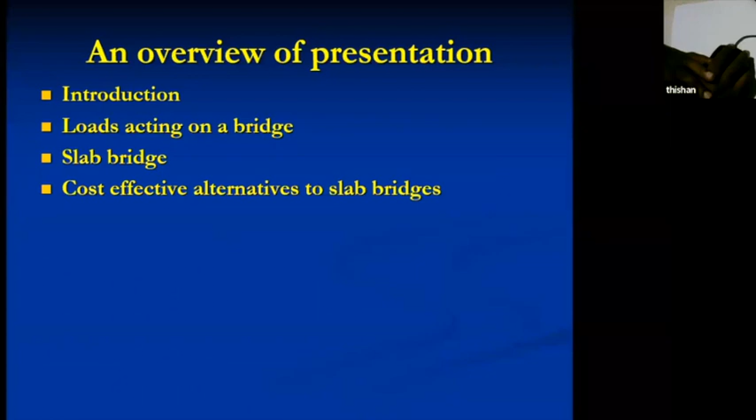So we can have alternatives for slab bridges, and how they have evolved. We can also look at value engineering solutions for flyovers, how we can use value engineering. That's a very important topic, especially in today's context, because we are having a financial crisis. In a financial crisis, it's very good if we can come up with economical solutions rather than typical solutions. That's where value engineering becomes very important.

Another topic very applicable today is elevated highways and expressways. For example, on the outer circular road in the Malabe area, the road is elevated because it's a floodplain. For elevated bridges or expressways, we need continuity to avoid expansion joints for about 5 to 6 spans. With only one expansion joint, there is continuity for the other spans, so the bridge is continuous. Continuity is a very important topic in today's context.

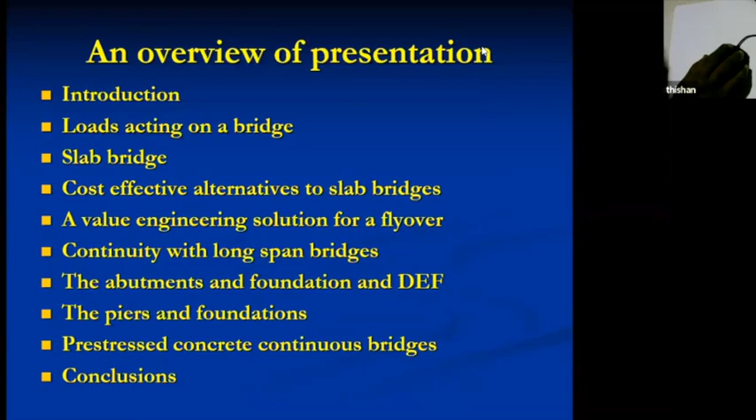Whereas if you look at most of the other elevated highways and expressways, they are actually continuous structures only for live loads. They are not real continuous structures; they are precast pre-stressed concrete elements made continuous using pre-stressed or reinforced concrete. So there are many different types of bridges available in Sri Lanka. It's important for us to first identify the different types of structures we come across in bridges. So to start with, I will stop sharing and tell you a little about the historical evolution of bridges.

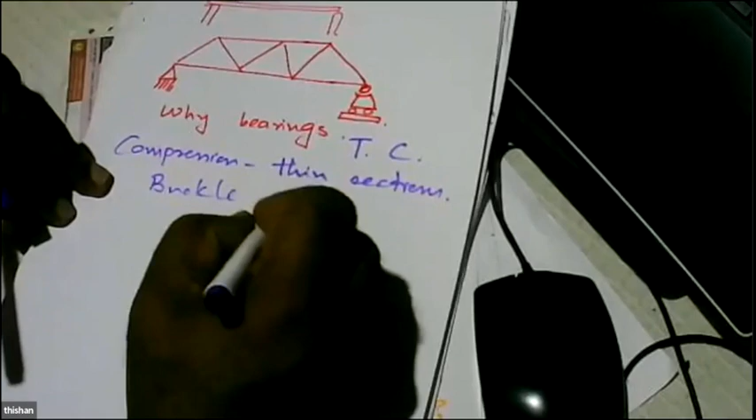Now steel is a very good material for tension and compression. But in compression, these thin sections would have a problem. What is the problem? They buckle. When you compress a thin steel section, the section can buckle and fail.

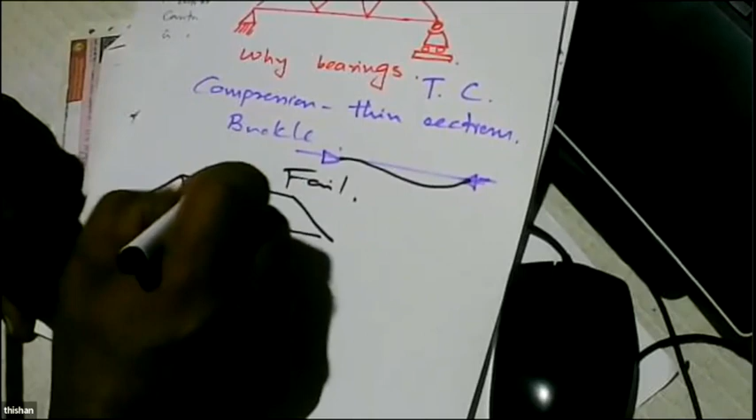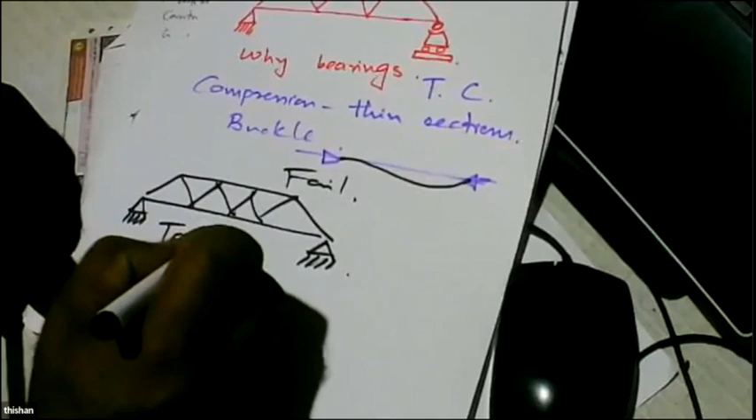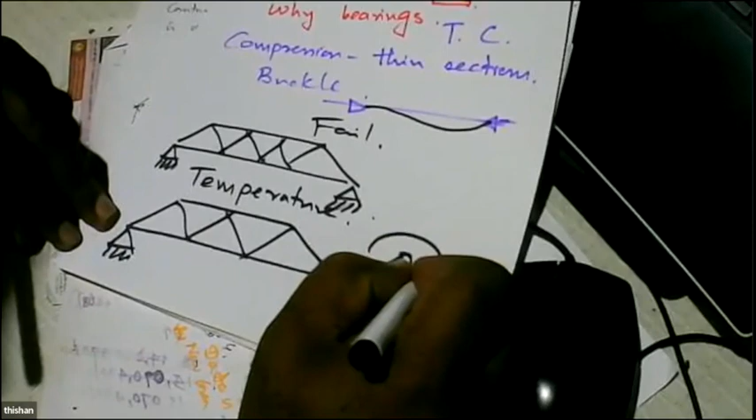So if you have a bridge like this and it is fixed, what could happen? There will be temperature induced stresses. Because of that reason, people thought if you have a bridge, it has to be on roller supports, and you can also have rocker supports, meaning it can rotate and move. So today we call them bearings.

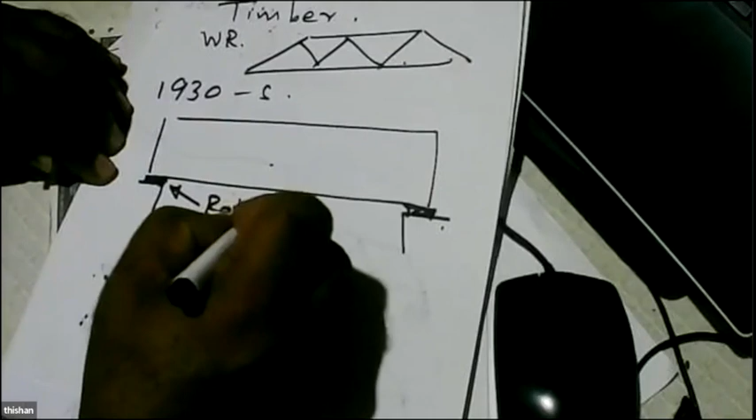In the 1930s onwards, people thought, let's have concrete for bridges, and you put it on a rubber pad. The rubber pad allows rotation and expansion, though this rotation would be very small.

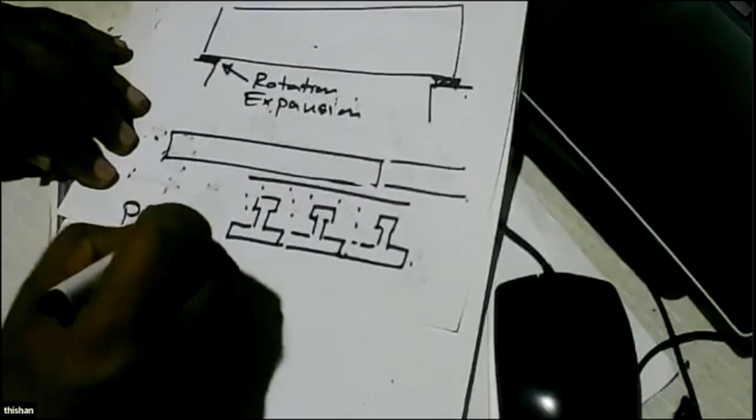Then they thought, let's go for beam bridges, thin slabs converted to bridges by placing precast beams like this, and then you put concrete. So you get a slab, a pseudo slab, that looks like a slab.

When they did this, they did it first in the cold countries. They thought concrete bridges also need bearings. So you get an expansion joint, a premix layer, and when you pass this joint, you can hear a sound from the tires of the vehicle.

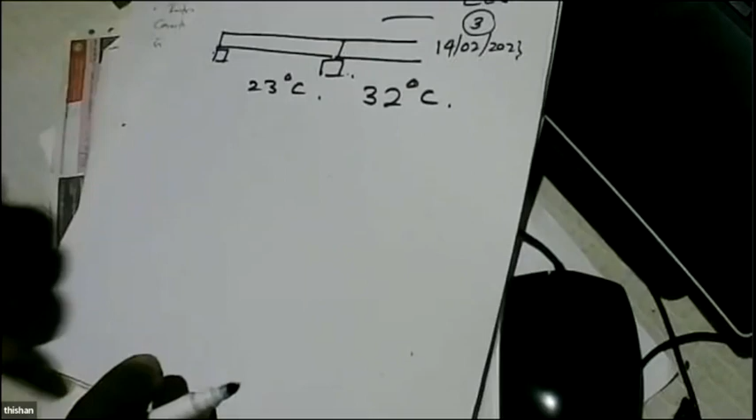So if you look at a country like Sri Lanka, our morning temperature is 23 degrees, even afternoon temperature is 32 centigrade—our temperature variations are very small. So even if you don't have expansion joints in Sri Lanka, what will happen? The bridge will expand during the daytime, and that can induce compression on these members. Because we have fairly thick members, the chances are they can take this compression very easily and will not buckle. Instead, it can lead to some pre-stressed concrete situation in the beams.

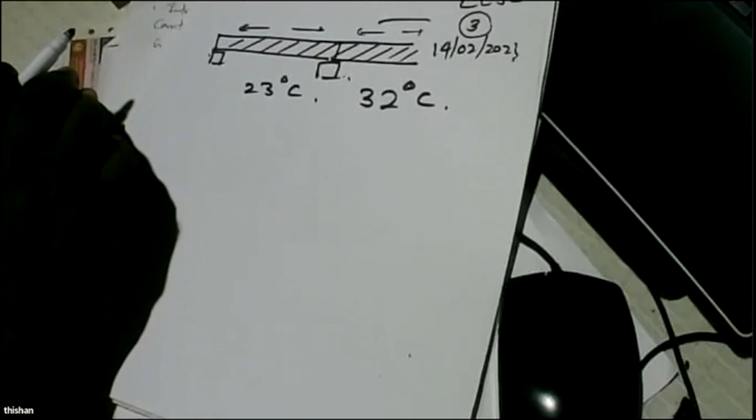So basically, we have been doing some studies for Sri Lanka, and what we found was expansion joints are not really necessary for bridges constructed in Sri Lanka. That's why you can see that we can easily have six spans or even ten spans as continuous, and then have just one expansion joint. Because at every expansion joint, you can hear a slight sound from the tires, that can be minimized by making the bridges continuous.

Our usual practice has been having about six spans of 30 meters each, so every 200 meters you would have an expansion joint. But our current work shows that even if you have one joint every 300 meters, nothing can go wrong in our bridges because our temperature variations are very small in the tropical lowlands. But in the upcountry, sometimes you can consider having a lesser number of spans, because we can't have very long bridges there—the topography does not allow continuous roads.

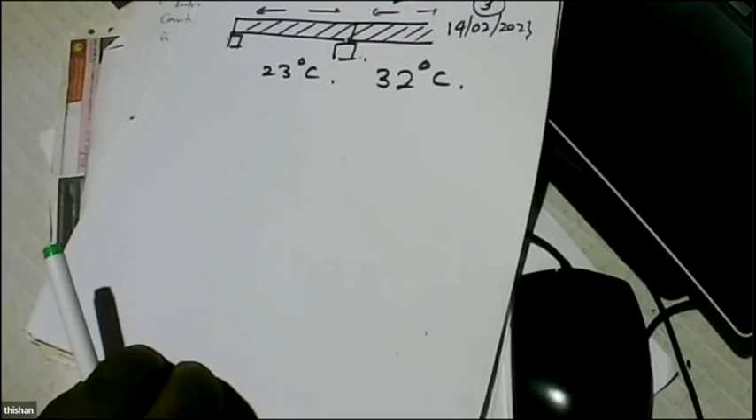So the chances are that most of our bridges, flyovers, and expressways where continuity is needed will be in the tropical lowlands with very low diurnal temperature variations—daily variations are very small. Because of that, even though the bridge heats up during the daytime, it's still possible to have a bridge where the expansion joints occur only once every 200 to 300 meters. That's one important point we have to keep in mind.

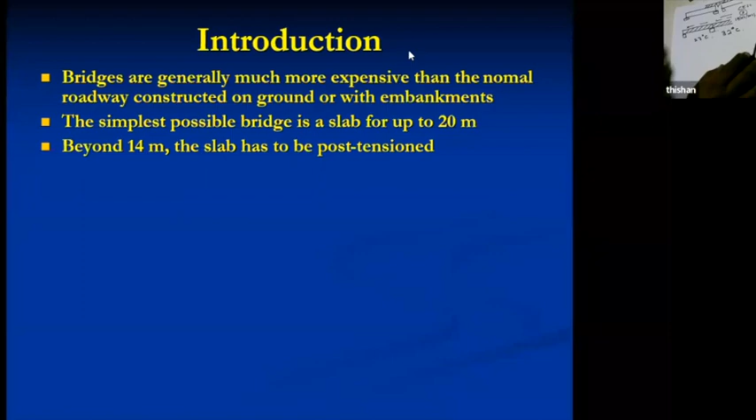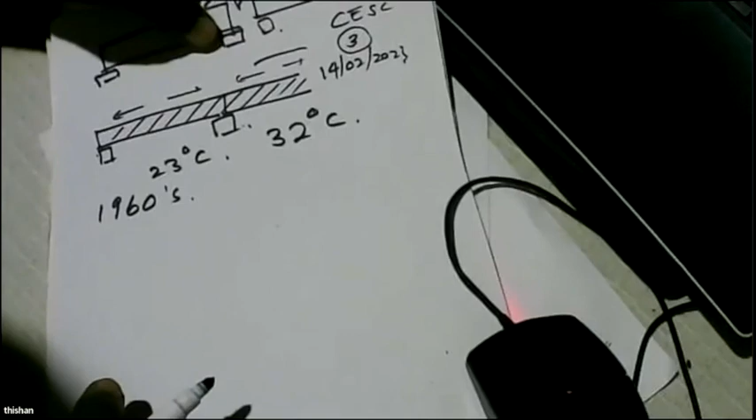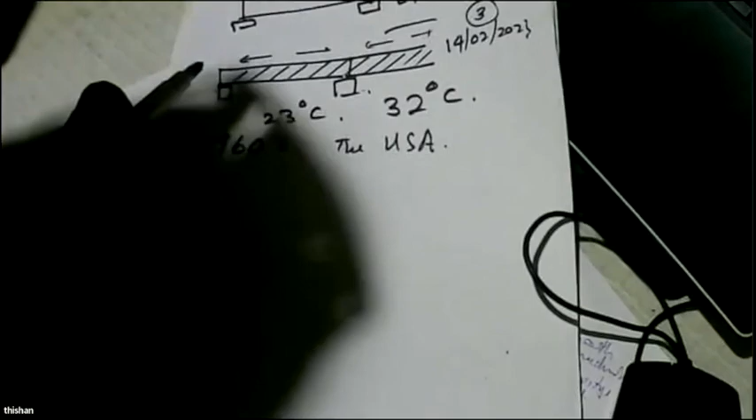So I can tell you something that happened in the USA. They had to develop their road network in a big way from the 1960s onwards, because road traffic increased a lot with economic development in those countries. A vehicle per family is a USA concept, but in Europe the concept was very different — it was a concept of public transport. However, from the 1960s onwards, they saw a change in policy, and then they had to develop many rural roads.

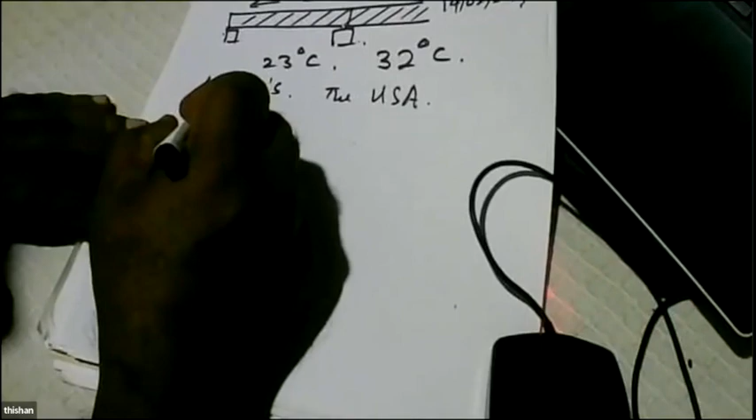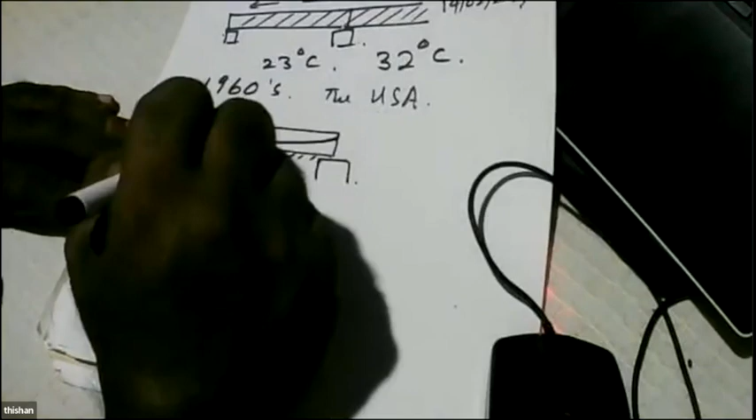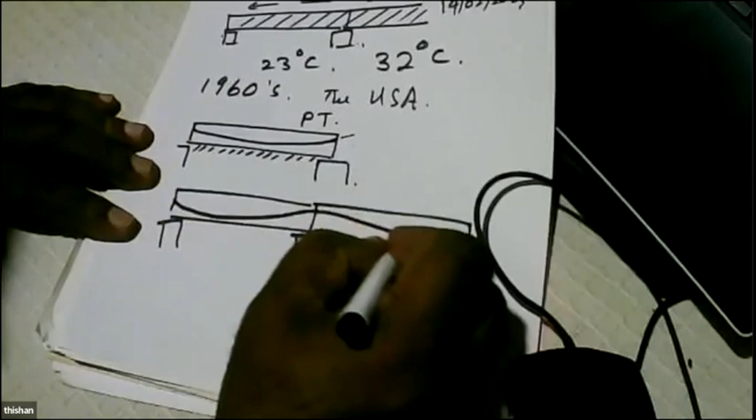They found that up to 20 meters, the easiest thing is to prepare some formwork and pour concrete. Before pouring, you place some pre-stress tendons, and after pouring, you stress it, making it a PT post-tension bridge. Sometimes they even did 2 spans in one go, with pre-stressing tendons like this.

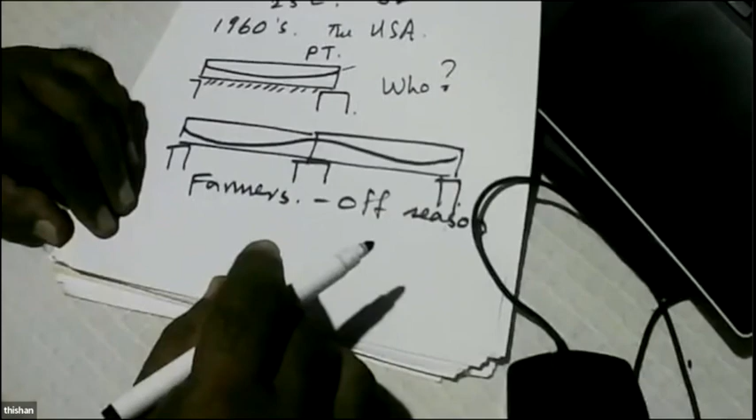Then you'll ask, who constructed these? Those were constructed by farmers in the off season. During the winter season they can't do cultivation, so they would build bridges during the season they don't have farm work. That's why slab bridges became so popular — people without much technical training can construct them once there's sufficient supervision, because these bridges are very simple.

And then what happened was, Europe was having a lot of highways, A-class roads. Then in the 1960s, they started constructing what we call motorways in those countries. In England they call it motorways, and in Germany, autobahns. Expressway is, I think, maybe a USA word, and in Sri Lanka we call it expressway, which implies access control.

So they had A-class roads, and the highway would come like this with abutments. These highways had to be completed very fast. They found there's no way you can have formwork here because it would block the road. So the ideal solution was to go for something precast and place concrete, so the disturbance to traffic is minimal. That's how precast construction evolved.

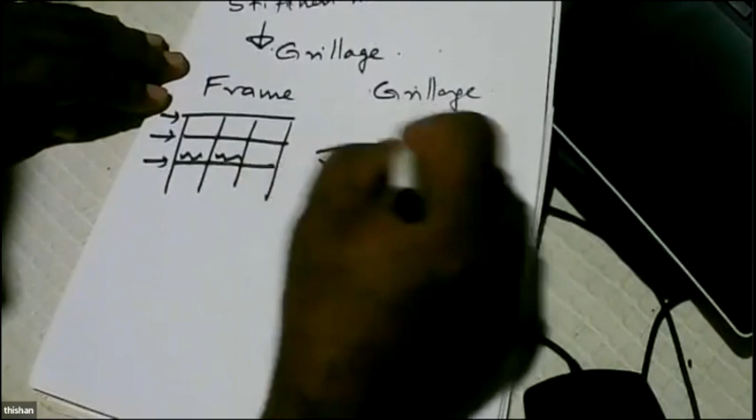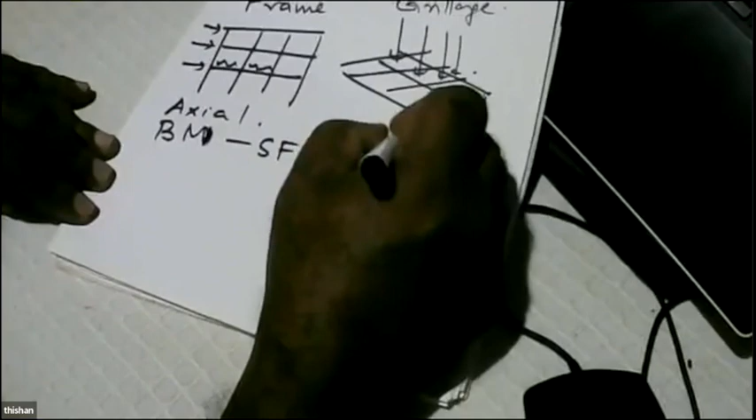On the frame, we apply the loads on its own plane. On the grillage, we apply the loads perpendicular to the grillage. So on the frame we get axial forces and bending moments — whenever you have a bending moment, you have to have a shear force. Here, in the grillage, you get bending moments, shear forces, and torsional moments, but no axial forces because it's loaded in the plane perpendicular.

And this grillage modeling using computers made the life of bridge engineers extremely simple, because earlier the problem was that you have a plate, with different vehicles using it, and finding the bending moment, torsional moment, and shear force was a huge task.

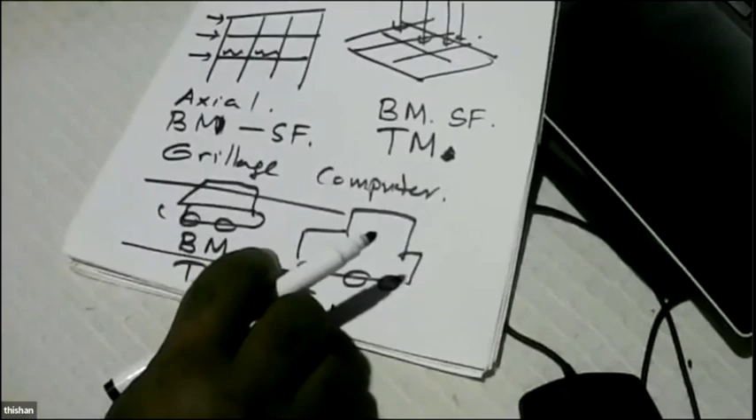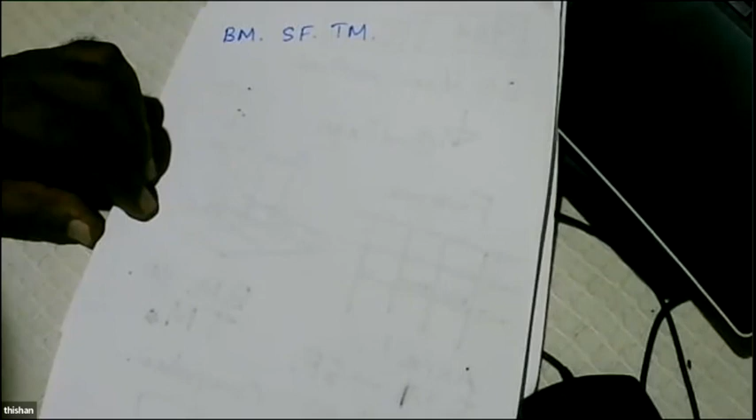Bridge engineers spent hours, days trying to find the maximum bending moment induced on a bridge. They spent a lot of time. But with computers, and once the grillage method was developed, things became much better because they could get bending moments, shear forces, and torsional moments in a much shorter time.

So that's another advancement that made bridge engineering a popular area of specialization.

To avoid formwork, slabs have been modified with precast beams and cover up to 18 meters. Still, a penalty has to be paid due to the self-weight, so there was some room for improvement.

For long spans, precast and in-situ cast methods can be used. As I told you, people now generally use 30 to 35 meter long precast beams, generally I-girders if they are pretty long. Otherwise, the standard Y beams and M beams can be used.

But we are actually using even continuous prestressed concrete bridges in Sri Lanka. One is currently being constructed, and about 60% of the work is already over.

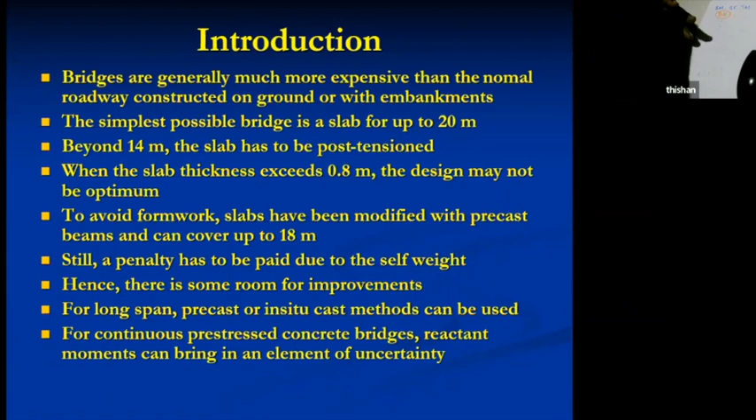So let's look at the loads on bridges. Bridges are supposed to carry moving loads, but when designing, we design the bridge for static loads. There are different types of loading. If you look at the British standard, we have type HA loading consisting of a UDL and a KEL load.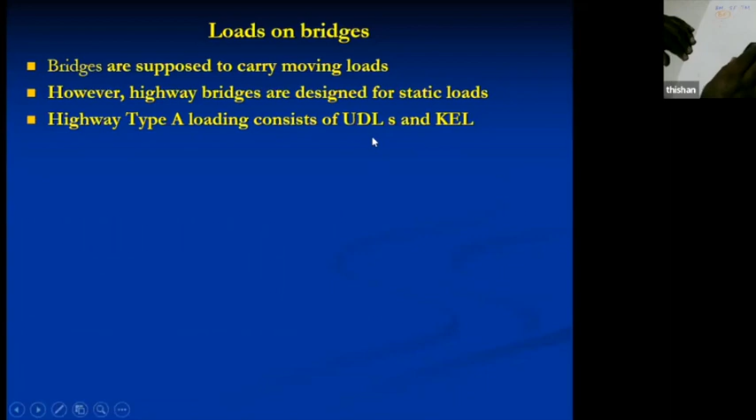You will ask how this UDL is developed, and this is how it was done. Basically, it is a series of trucks weighing 24 tons, with length about 6 meters, and then you have another truck, another one.

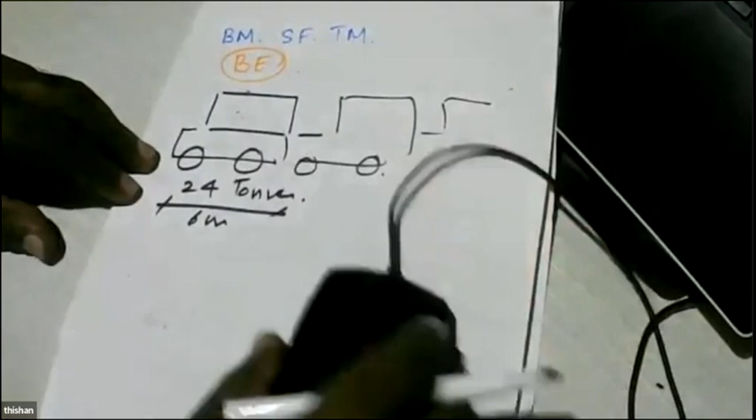Then when you look at the effect of this, you have a lane which can vary from about 2.3 meters up to 4.8 meters. Generally this is a variable parameter. For a lane which is about 3.5 meters, they found that this load can be about 30 kilonewtons per meter per lane, giving an intensity of about 8.5 kilonewtons per meter squared.

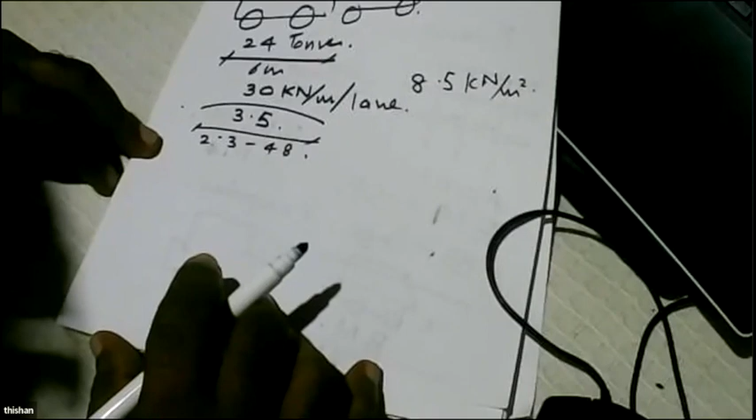So if somebody asks what is the kind of load that you generally use to design a bridge, what is a reasonable value to get some idea about the kind of loading on a bridge? The answer is about 8.5 to 10 kilonewtons per meter squared. That's the kind of answer you should have.

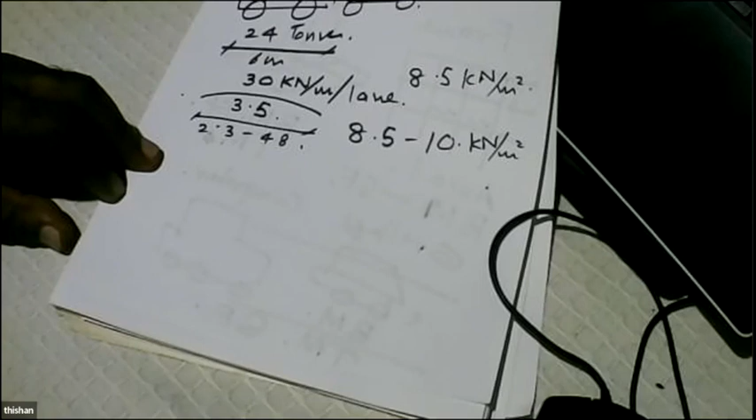If somebody asks what is the load in a building, if it's an office building, the answer is 2.5 kilonewtons per meter squared. If it's an auditorium with fixed seating, it's 4 kilonewtons per meter squared. If it's a hall where a large crowd can gather, the load is about 5 kilonewtons per meter squared. That's why in pedestrian bridges we generally use a value like 5 kilonewtons per meter squared. But if it's a bridge where vehicle traffic is expected, a good value is about 10 kilonewtons per meter squared, though generally it can be slightly lower than 10.

Keep in mind: for crowd loading in an office, it's 2.5. If you have a house, it's 1.5 for bedrooms, 2 for areas people can gather, so living area has to be 2. If it's an office building, 2.5. If it's an auditorium with fixed seating, 4. If you expect crowd loading, 5. Even in a bridge, pedestrian load is about 5. And if it's a vehicle bridge, the load is double the pedestrian load, so it's 10, or slightly lower than 10.

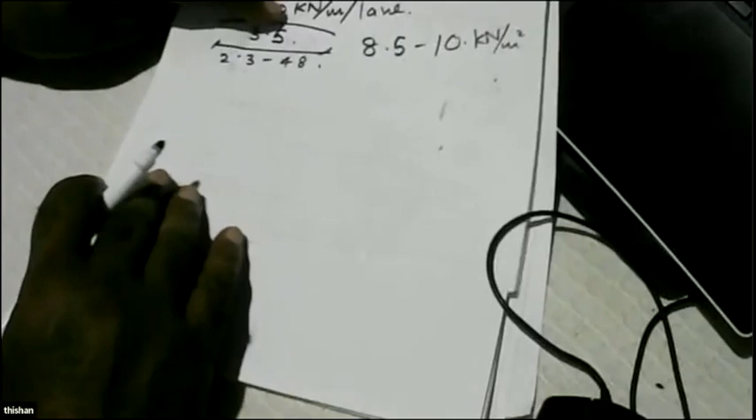When you know these numbers, it's very good, because when the general public asks questions, you can immediately give a reasonable answer, so they feel that the engineer they are speaking to is knowledgeable, since they can give a reasonable answer to whatever question is asked. So as engineers, it's good if we can develop this kind of database, whatever the subject area.

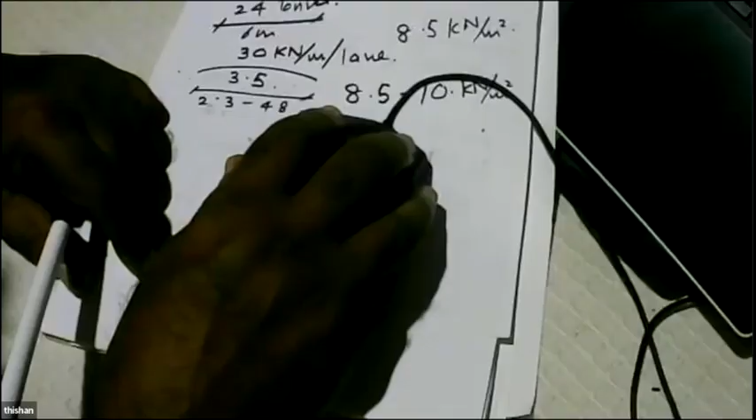So, in addition to that, we are now talking about the effect of axle load. This is taken into account by using a load with a total magnitude of 12 tons, or 120 kilonewtons. If you look at 120 kilonewtons and the lane width of 3.5 meters, 120 divided by 3.5 is about 34 kilonewtons.

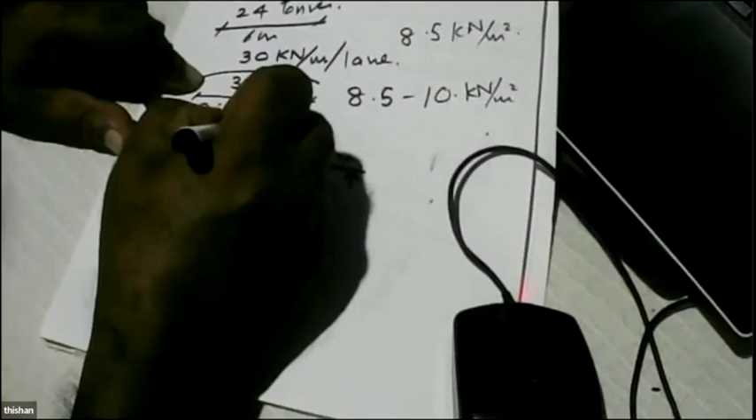So when analyzing a bridge, we can say we are going to get a UDL. If you are interested in the maximum shear, place this 34 kilonewton load close to the support, considering a meter width of the bridge. On the other hand, for the maximum effect for bending moment, we place this load in the center.

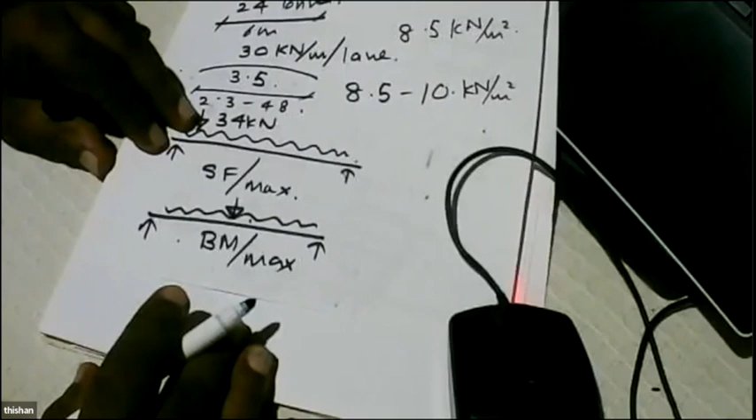Now you can see why load evaluation has become difficult for bridge engineers. If it's a building, we just give an average value and design for that, like 4 or 5 kilonewtons per meter squared. But in bridges, the vehicles are moving, so we have to consider that these moving loads can give different values for the maximum, depending on how we place them.

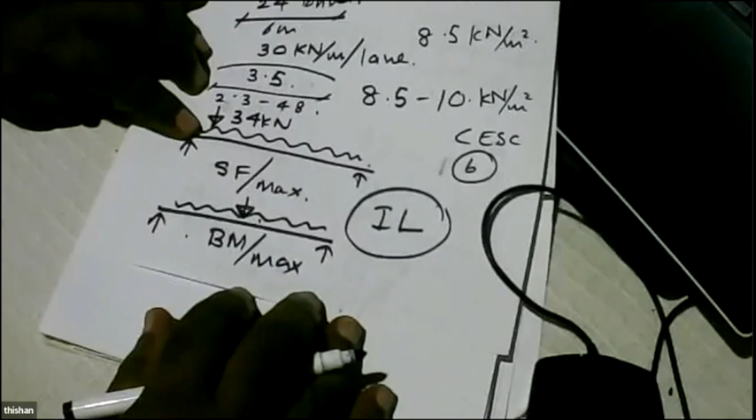That's why bridge engineers decided to make use of influence lines, because people found that you can't just consider static loads, you have to consider moving loads. So one simple example: if you want the maximum effect on shear, place the concentrated load or knife edge load pretty close to the support. Whereas if you want the maximum moment effect, place the knife edge load at the center of the bridge.

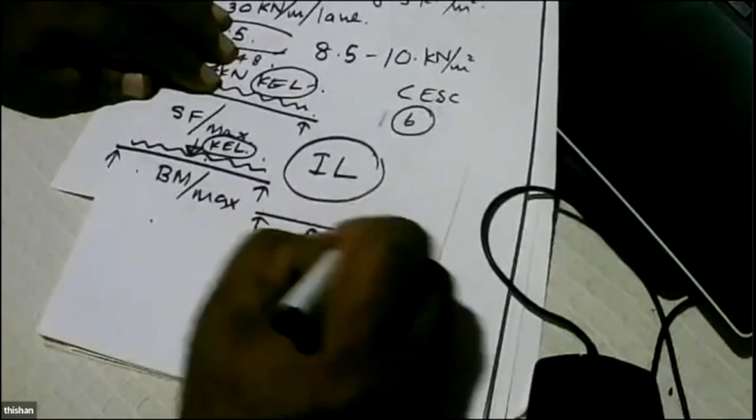And if you want the maximum effect in a continuous bridge, we load both spans simultaneously to get the maximum effect over the support. On the other hand, if you want the maximum moment in the span, we load only one span in a two-span continuous bridge. So you can see for one bridge, you can get so many different combinations of loading.

But not only that, when we place the vehicle on the bridge with parapets, we can place it here, or it can come to the middle, or to one side, or both lanes could be loaded. So there are many different options when it comes to bridges.

That's why bridge engineering is very different from highway or building design. There are so many different combinations to consider, and because of that, we have to spend more time finding the maximum moments that can possibly act on a bridge.

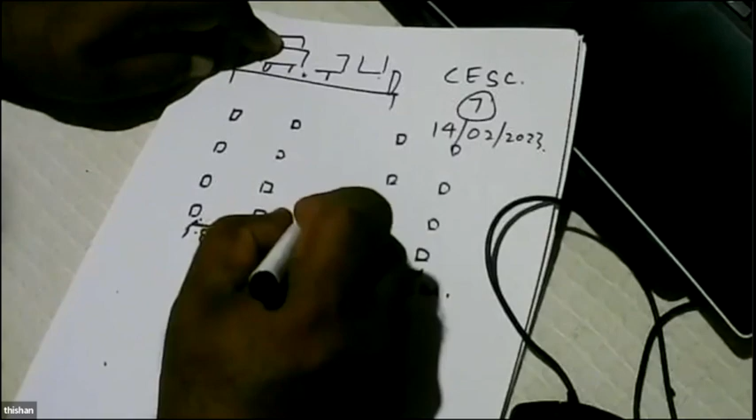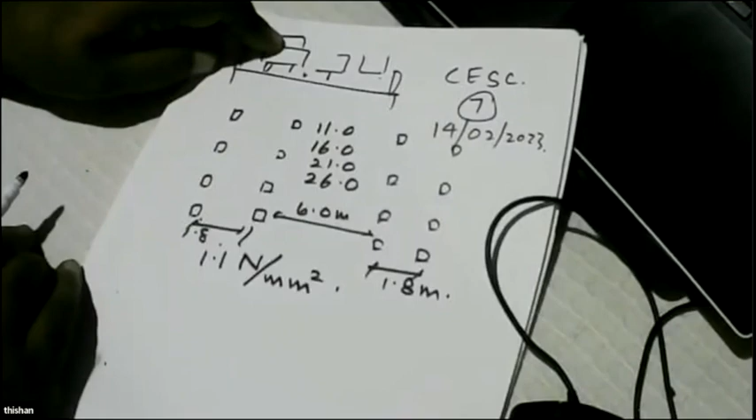So then we have another 2 axles, and the distance between these 2 axles is 1.8 meters, and the clear distance between these 2 axles is 6 meters, but it can vary to 11, 16, 21, and 26 meters. So you can have 4 different values.

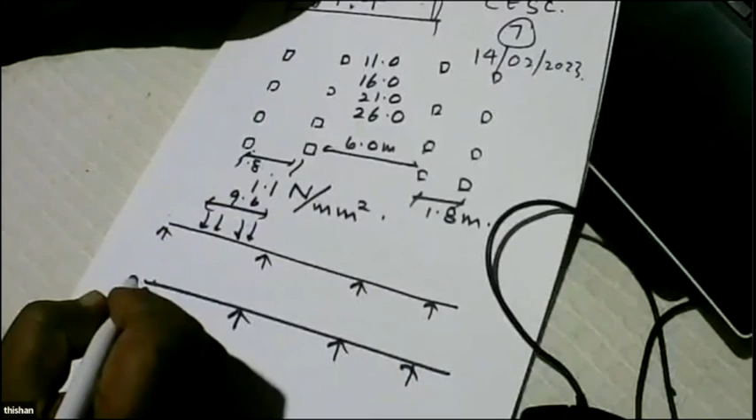And you will ask why do we need vehicles of different lengths? In a continuous bridge like this, sometimes you'll find the bridge span is so much that we can place the whole 6 plus 3.6, 9.6 meter long vehicle fully within one span. The span is large, and the width of the vehicle is 3 meters, but the overall width of the vehicle is 3.5 meters. So you might find this possible, or a different possibility.

Now, in this case, you get the maximum bending moment here. In this other case, you get the maximum bending moment at the support. So different scenarios are possible, and because of that we are asked to vary the length of the vehicle. So I'll share again.

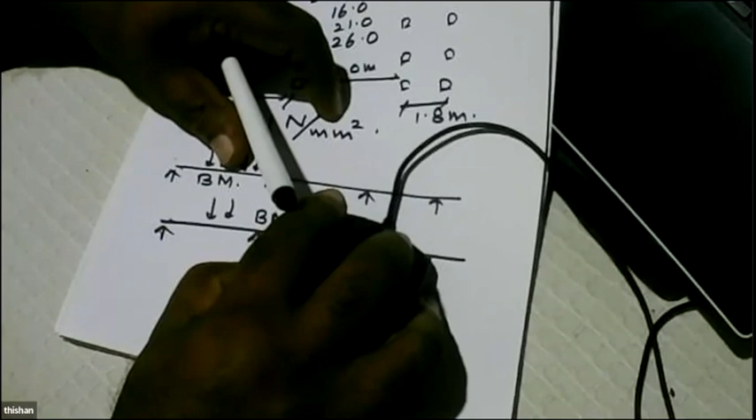And the magnitude is 1 ton per axle. So if you have 25 units, with 4 axles, that's 100 tons. Just imagine a vehicle of about 10 meters length having a weight of 100 tons. If you look at the heaviest vehicles on our roads, one of the heaviest is this Ashok Leyland or Tata 10-wheeler with a flatbed.

On a flatbed we can have 600 bags of cement. 20 bags of cement is 1 ton, so 600 bags means 30 tons for the truck load. The truck itself is also heavy because it has a heavy engine, being a powerful vehicle, axles, and all that, so the weight of the vehicle can also be about 6-7 tons. If we assume the vehicle weight to be close to 10 tons, we are talking about a 36 to 40 ton vehicle over a 10 meter length.

If you look at the lowest abnormal load, HB type load is 25 units for minor roads, and for any major road the minimum is 30 units of HB, a 120 ton vehicle. But if you look at a few bridges, especially this port access road, it has been designed for 45 units of HB, or a 180 ton vehicle.

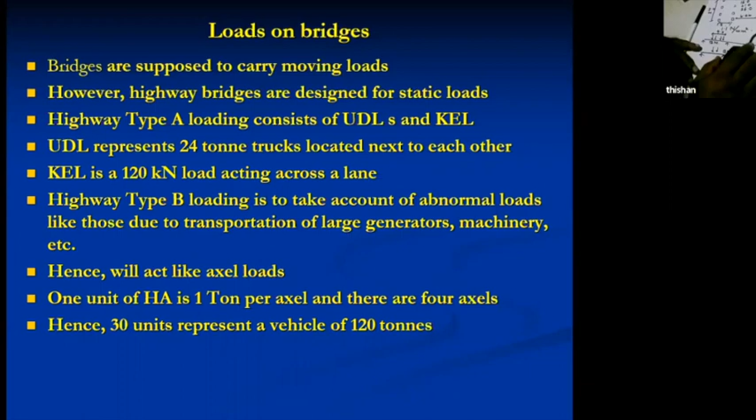There are strict standards for trucks, and the one country where you can see severe overloading of trucks is India. But in Sri Lanka, generally we try to avoid it, because our road conditions do not allow us to overload too much, since our roads have a lot of bends, sudden steep sections, and so on. If you overload the lorries, it's very difficult for them to negotiate those situations. But in Sri Lanka, we generally do not resort to that type of practice.

The heaviest vehicle you get on the road could be about a 40-ton truck. But then again, you would have seen prime movers pulling even 1,200 bags of cement. What you see is they have more axles, and because of that, the impact of such vehicles will not be that significant. A shorter vehicle with a heavy load can be much more significant than a longer vehicle with a heavy load, because the longer vehicle can have so many additional axles.

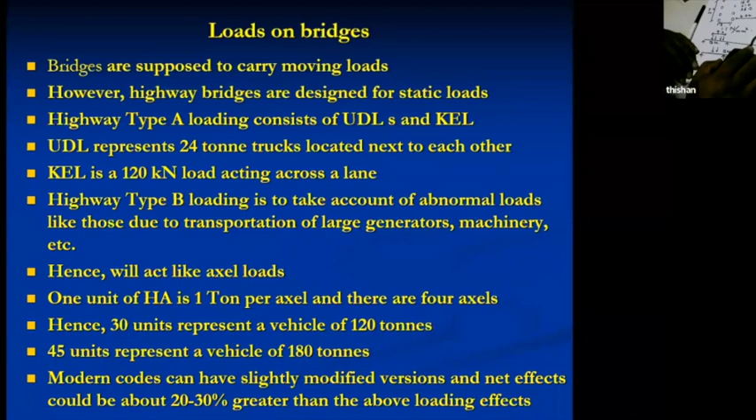Sometimes the effect of modern codes, for example Eurocode, will allow you to go up to 360 tons. So we always have to see what is a desirable load when designing a bridge.

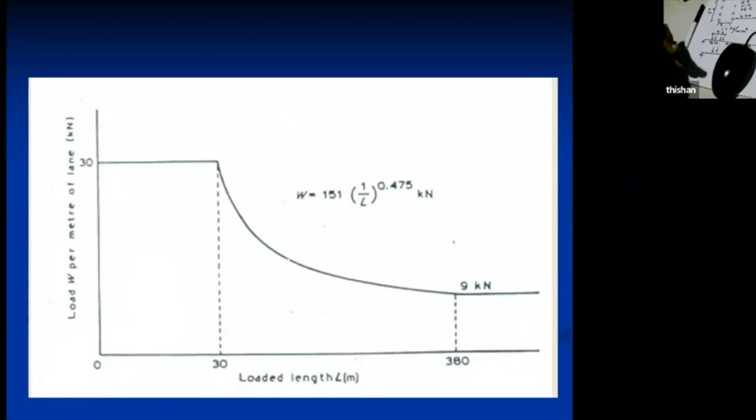This is something that happened after the opening of the Channel Tunnel in England. The Channel Tunnel allows heavy vehicles to be transported by train under the sea — some 30 kilometers long, under the English Channel. It was constructed in the 1990s.

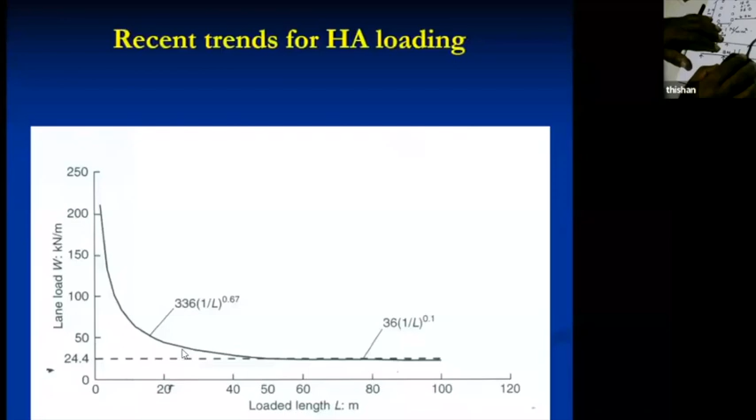Once it was opened, heavy trucks could easily be transported to England. So they found that the loads used as per the 1978 guideline may be a little too low, and they should go for higher values. For about 30 meters, this value close to 30 is okay, but earlier the load was flat below 30 meters. In this new one, it keeps going up all the time. You'll find this is one of the heaviest loads that could result on a bridge. So these are all approximate predictions, but this particular prediction actually gives a pretty high value.

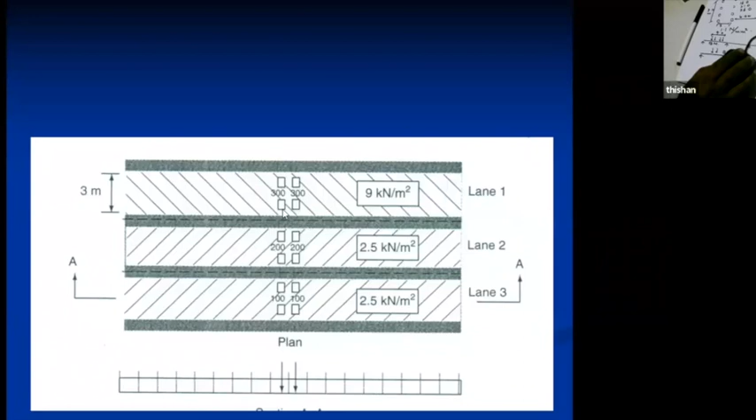Then you can look at what the Eurocode says: 9 kilonewtons per meter squared, and you can have a tandem loading where the magnitude is 300 kilonewtons — 30 tons, and another 30 tons with a small spacing. All these loads are pretty similar, but you have to consider them differently based on different arrangements: single axle single wheel 20 tons, single axle 40 tons, or tandem axle 60 tons, with a distance of 1.2 meters.

So when you look at all this loading, there's one important point: we are going to analyze a lot, because there are so many different loadings to consider. They act all over the bridge, perpendicular to it, and you have to spend significant time working out which gives the maximum. That is not an easy task.

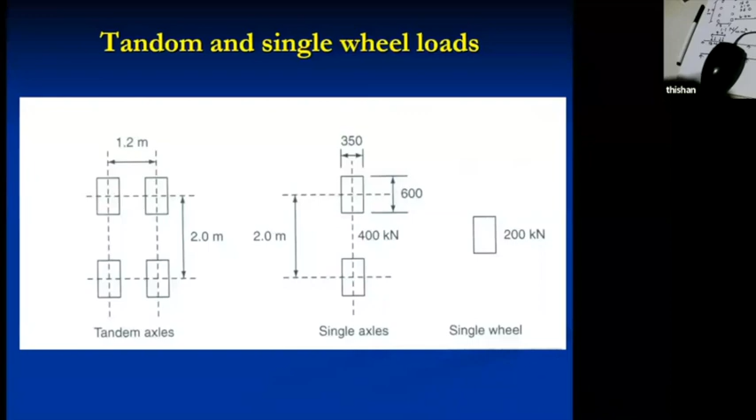So because of that, these days we always get the help of computer software like SAP 2000, CSI Bridge, or MIDAS, and create a grillage, then apply the loads on the grillage, and try to get the maximum bending moments and shear forces. If you are not familiar with grillages, just read a book or type grillage analysis on the internet, and you can get enough videos and other information. If you can get hold of a software like SAP 2000, you can easily create a grillage in a few minutes, apply the loads, and see what's going on.

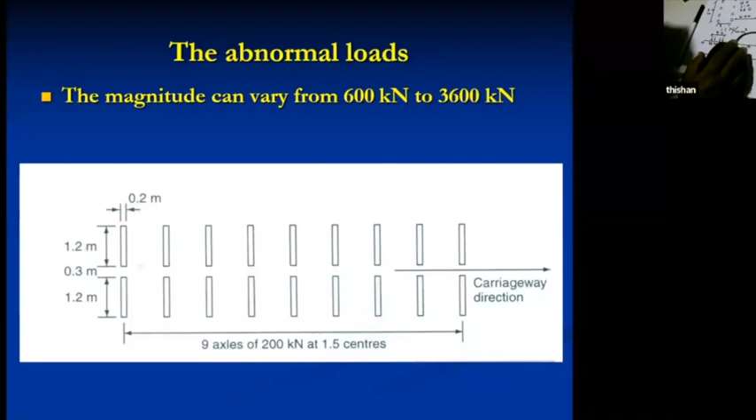Then you can have the abnormal load, and you can see 9 loads of 9 axles, 200 kilonewtons at 1.5 meter spacing. This gives a total of 1,800 kilonewtons, so 180 tons. It can actually vary between 600 kilonewtons going up to 3,600 kilonewtons. If you refer to the Eurocode, you can see it allows you to consider different HB type loading depending on the type of highway.

Now, before we go into the actual design aspects, I would like you to know what a very experienced bridge engineer taught us in 1990, 11 July 1990, at University of Cambridge. His name is Robert Benaim. Robert Benaim has actually written a book on bridge engineering, which is a very nice book to read, and his knowledge was superb.

He came and said: concrete bridges designed to our codes of practice - when he refers to code of practice, he is referring to the kind of loading and the various partial factors of safety we use in design - are not at risk of failure due to global actions under the specified traffic load. The search for excessive accuracy in the calculation of transverse distribution of moments due to live loads, for instance, is a waste of time. It's far more profitable to think carefully about the stresses which can arise in a cast in situ bridge deck during construction due to temporary conditions, high initial pre-stress forces, settlements of foundations, and above all, heat of hydration.

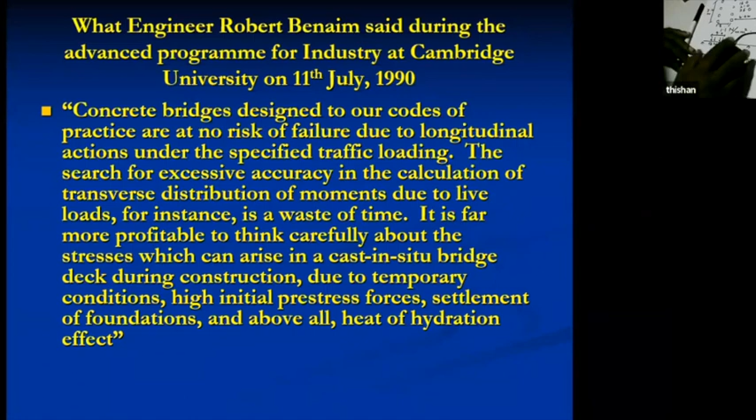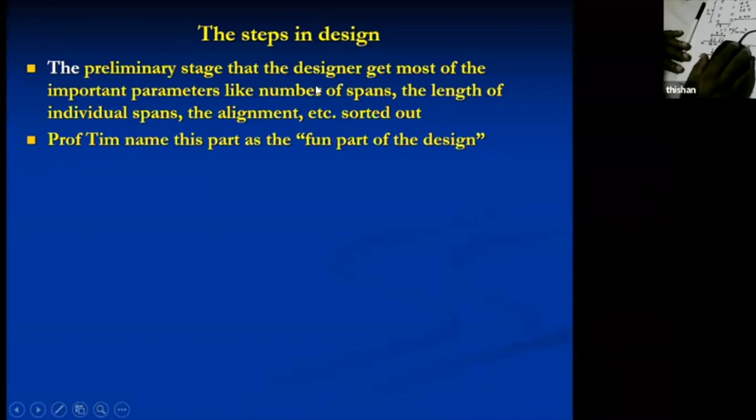So what are the steps in bridge design? When you are designing a bridge, what are the steps? First, you have to get the preliminary design done. That is the most complicated thing, because although we say preliminary design, you have to get all the parameters almost right, and then you can use the detailed design to check it.

We had one Professor Tim Ibell as our external examiner. He was the past president of the Institution of Structural Engineers, London, in 2015. He's a very brainy person, and he says, okay, this is the fun part of design - you are not dealing with complicated analysis or anything, but you are looking at your deep knowledge base, and trying to come up with something reasonable, so that the detailed calculations can be performed for what you have found at the initial stage using various approximate methods. You try to arrive at a reasonably accurate solution without doing many calculations. That's a real challenging part of bridge design.

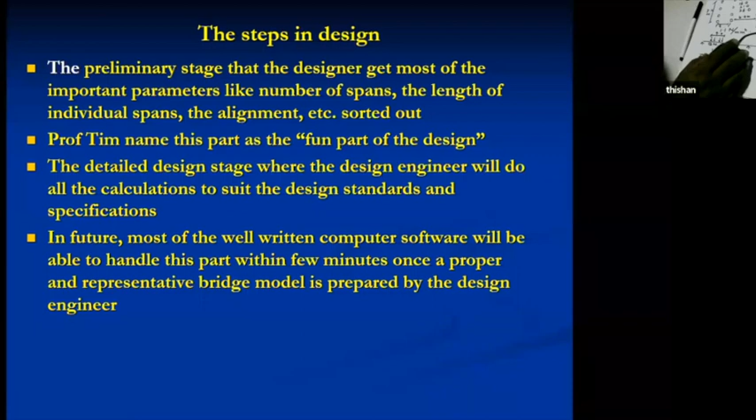And once you get a solution, you have to check that solution to see whether you have got all your calculations right. That is part of the design, that any routine set of calculations would be... anything routine these days, somebody will write a computer program. So most of the detailed calculations can now be performed by the computer, and they can even produce calculations to suit various codes of practice. For example, MIDAS Civil or CSI Bridge can easily handle and produce many calculations that are very accurate and well presented.

But always you have to make sure your preliminary design is so accurate, so that it represents a good arrangement for a bridge. So I will skip this reinforced concrete bridge part for the time being, because I want to discuss the precast beams and how the bridges have evolved, before we go deeper into reinforced concrete bridges, where we have to learn concrete technology, and also the principles of optimizing concrete bridges. So those are things we have to discuss.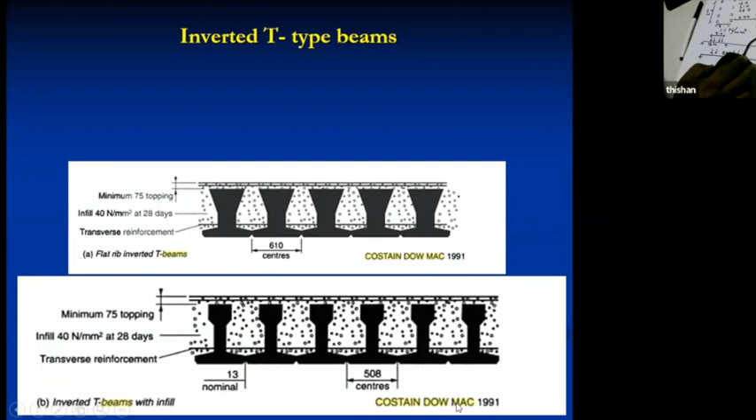So if you look at this diagram, here you can see that the beams are placed touching each other, and then it's filled with concrete. These are standard beams by Costain Dow Mac. And you'll find in Sri Lanka also we have adopted very similar dimensions, only minor variations, by Road Development Authority. So very similar dimensions for bridges, and this type of bridge can be used up to 18 meters.

One of the key things you have to appreciate is, if you consider self-weight of the bridge, the bending moments caused by the self-weight might be about 200% of the bending moments caused by live load. So you can see the dead load is much more than the live load. When people realized this, they thought okay, this might be okay for shorter spans, but if you are going to go for longer spans, like 30 meters, then filling the whole deck with concrete is not a very good arrangement, because it's very heavy.

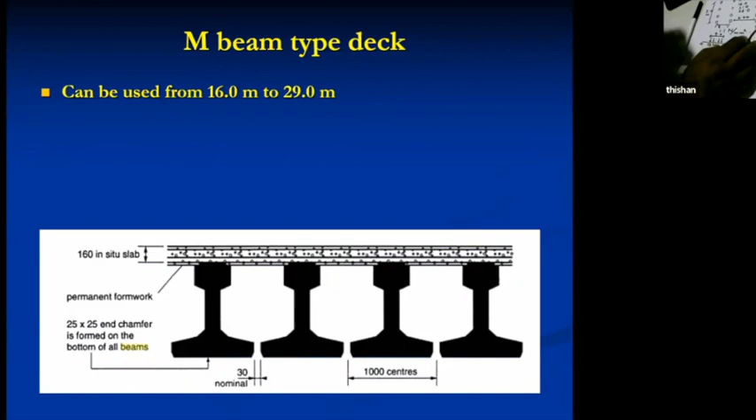Then they went for this arrangement. Now you can see the main drawback is you cannot inspect anything from below, because the gap is only 30 millimeters between two beams. So you cannot inspect what's going on, whether the bridge is deteriorating or whatever happens. But there's significant reduction in the weight of the bridge, and this is called M beam.

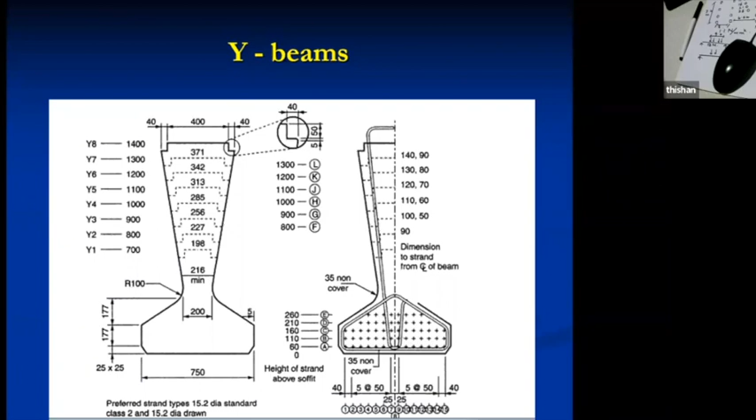And then later in the 1990s, they actually developed what is called the Y-beam. The speciality of the Y-beam is you don't have to place it touching each other. You can place them at 1 meter interval, but there will be a gap, and you can even place them at 2 meter intervals. So here you can see Y-beams at 1 meter centers or Y-beams at 2 meter centers. The small spans are Y-beam at 2 meter spacing. This longer span going up to 31 meters is Y-beams at 1 meter interval. And the Y-beam dimensions, sectional dimensions, everything is given in the chart.

So by using this particular chart, you can work out the arrangement of a Y-beam, and straight away you can say what is the type of Y-beam, the dimensions of the Y-beam, and generally we go for a top slab of minimum 160 millimeters. But in my case, I prefer some value like 200 millimeters for the top slab with 2 mats of reinforcement. And that can give a very satisfactory behavior for this type of bridges. So the arrangement would be something like this.

So these are very economical arrangements and widely used whenever you have an obstacle like a river or a road, where in the case of road and river, you don't like the boat movement being affected. These are ideal solutions because very easily you can place these beams after closing whatever is underneath for 1 or 2 hours.

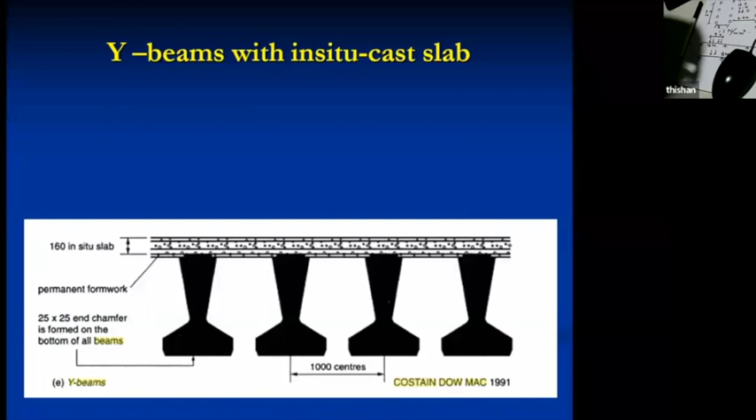You can very quickly lift and place the beams, and then connect them all with a reinforced concrete top deck, giving a composite construction. The advantage of composite construction is once the concrete gains strength, the depth of the section increases, and now it's a thicker, deeper section. All this deeper section is now available for carrying the live loads, because we are carrying live loads on a reasonably lightweight deck. We can reach significant economy.

So the spacing can be 1 meter going up to 2 meters.

I have one of my friends, Mr. Atula Tantri, who manufactures trailers. This was about 15 years ago when we did all these bridges. One day he met me and said, 'Prof, I actually went and measured all these bridges to see whether we can manufacture this type of steel bridge in Sri Lanka,' because he has a lot of sophisticated cutting machines, as his company manufactures most of the flat decks, flat beds that carry 40-ton, 40-foot containers. So his company has a lot of facilities for fabrication and manufacturing of steel sections. He said with his facility he can easily manufacture this type of bridge in Sri Lanka, prefabricated and then fixed at the site.

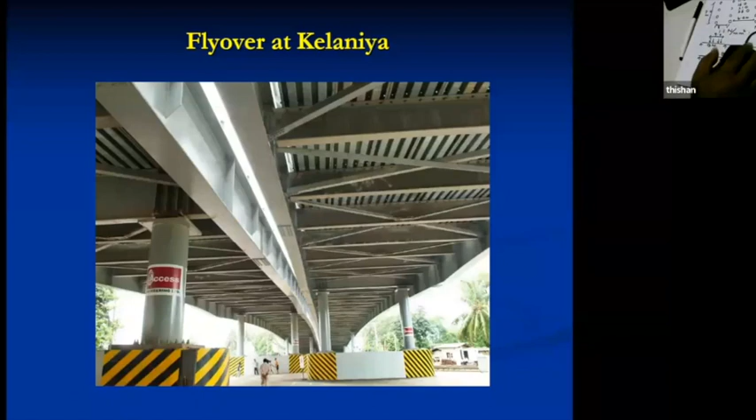This is one figure, and this is how it looks like from below, with so many bracing arrangements, and even a lot of web stiffeners for the beam to prevent buckling of the steel sections.

I think this is the Kelaniya flyover. And you might ask, what is this? This is the Sangappuddi Bridge at Pooneryn. How would this come here? This is actually the flyover meant for Panadura town, but due to some reason they found it was not necessary, and it ended up connecting Jaffna Peninsula with the mainland at Pooneryn, called the Sangappuddi Bridge. But if you look at this particular bridge, I would say it's a mistake, because now this bridge is directly over the sea, and the chances of corrosion can be high. It would have been far better if they had actually galvanized this bridge—whatever sections were brought to Sri Lanka, if they had hot dip galvanized them, then this bridge would have lasted much longer.

There was one bridge built by German aid in 1962, and I found that particular bridge is fully galvanized. They have galvanized it. But earlier we used to have bridges where we didn't paint it, we painted it with bitumen. And those bridges lasted very, very long times, because bitumen could give near perfect protection against corrosion.

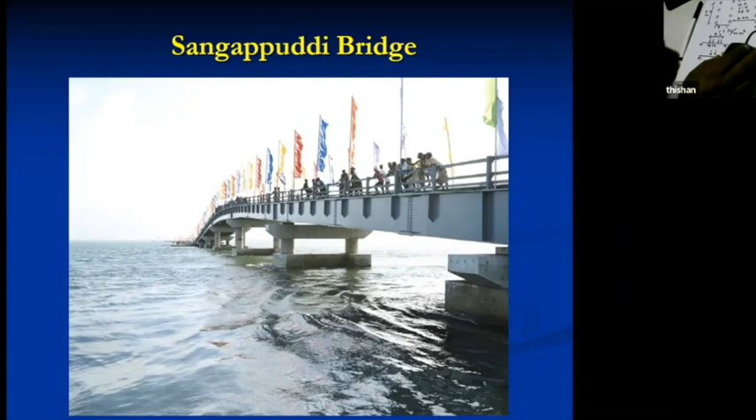But today we rely a lot on paint systems. Sometimes these paint systems can give us trouble. So this may not be a very good solution, but anyway, they have actually constructed it.

And then you might ask, what is this? This is the Orugodawatta flyover, and again you can see there are 4 lanes. The main difference is between this particular long span bridge, which was 550-600 million with a lot of extra work for pipe diversion, whereas for a single span, sorry, a 2-lane bridge, this is a 4-lane bridge, a 2-lane bridge having a length of about 300 meters.

We read on paper the cost would have been about 800 million. So you can see, the 2-lane bridge cost 800 million, the 4-lane bridge costs less than 600 million. So there's something wrong somewhere.

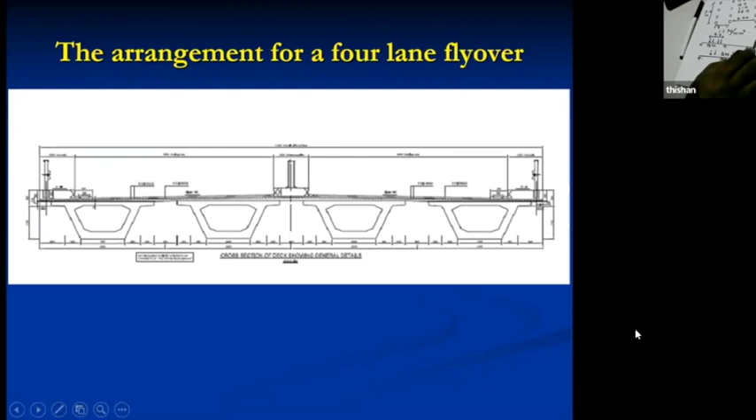And this is the Mattakkuliya bridge. Although it was fully completed, the access roads had many problems, so it was underutilized for a long period of time. This bridge is also across the Kelani River.

And if you ask the cost of this bridge in the late 1990s or early 2000s, the original estimate was 210 million, but later it was completed for 200 million.

The project manager, project engineer, was Mr. Chandasiri, one of the well-known bridge engineers, who was later responsible for getting the Southern Expressway opened up to Galle first and then up to Matara. A very dedicated bridge engineer. And if you can get an opportunity, please invite him to do a lecture.

He's retired and he might not be very active in doing engineering work at the moment, but for about 5 years he worked on the Southern Expressway section 1 also. So if you can get him to do a lecture for you, it's a bonus because he has vast knowledge of construction and design of bridges.

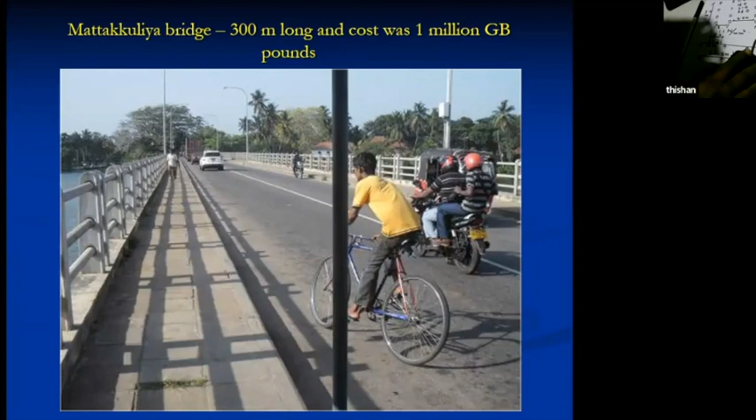So basically, he is very capable and he can design a bridge on a half sheet. On a half sheet, he will do all the calculations and complete the design. So he's a very capable person.

And this is the Orugodawatta flyover. This is the Mattakkuliya flyover. So you can see these box type beams.

Then this is another bridge that I actually helped Engineer Wansena of Maga Engineering to complete for Maga Engineering. This is again a value engineering solution. The original design was by Engineer Nivara Chandasiri with raft foundation, but later I was asked to help them, so I actually helped them with the design. A value engineering solution that resulted in a big saving in the cost.

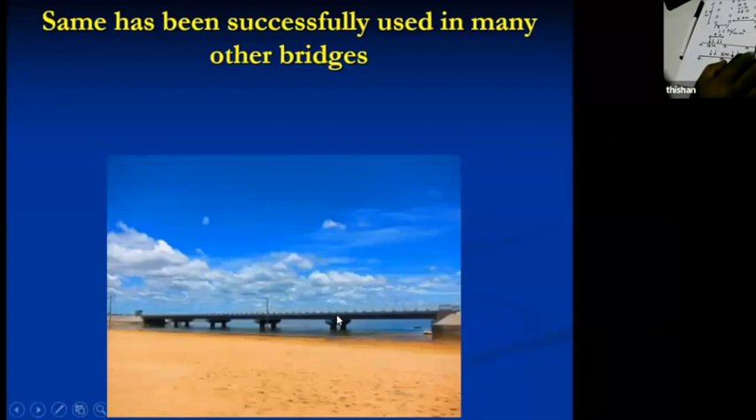This bridge has five spans, and the same design was used in a three-span bridge, with each span being 25 meters of I-girders that were precast and post-tensioned at the site. This bridge was completed in a very short period of about 4 months. And this is another view of the same bridge.

We also used a special detail to avoid expansion joints in this particular bridge. This is the same detail that we adopted for Orugodawatta flyover as well. What we do is we get the precast beams, and then we cast the top slab continuous. This can be about 200 millimeters, and this can be about 1.5 meters.

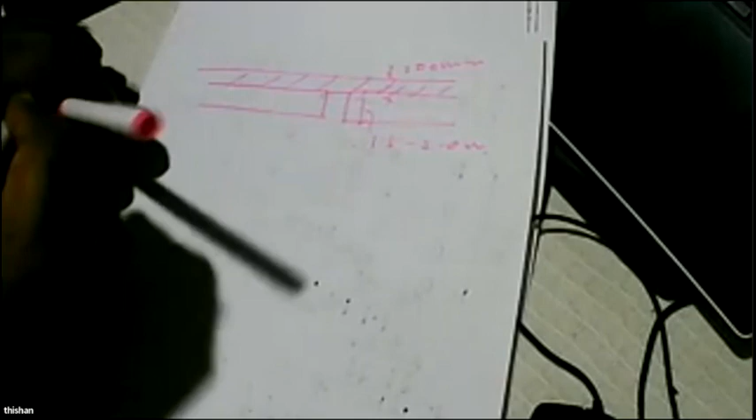After making it continuous, we place some dowels and cut a groove and fill it with polysulfide and lay the asphalt.

Lay the asphalt on that. So when you cut it, you can see it's actually connected by a dowel. Here you get a dowel, so no movement can occur, and you find the crack forms under the dowel as well. So on the road you cannot see an expansion joint, but if you look at the behavior, it's because of the presence of these dowels that are free to move. How do you make a dowel and then allow the beam to move freely?

What you do is, before you do the concreting, you wrap a polythene sheet around the steel rod, and then continue casting. Once the casting is over, there's a connection, but it's flexible. There's a connection between two adjacent beams on each span, and there's a connection with the dowel, but not a complete connection. Any minor movement can be easily accommodated.

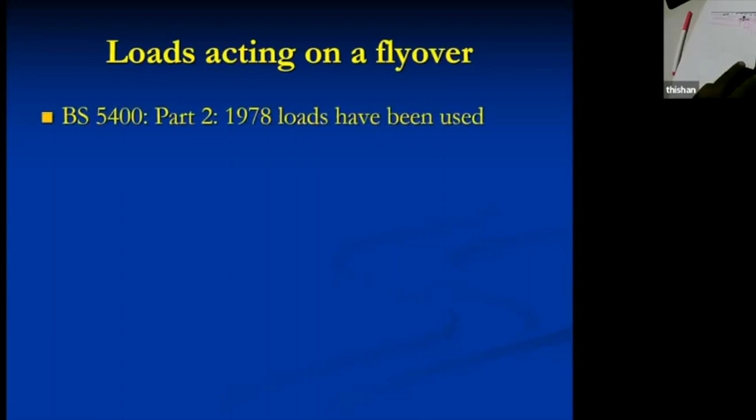So you can see a deck slab will have a lot of reinforcement, and because of this reinforcement you will find it can give a very robust type of bridge, because when you consider a load of 10 kilonewtons per meter squared acting on a deck of 200 millimeter thickness with two layers of reinforcement, with bottom reinforcement as H16 at 150 millimeters. H means high yield bars, and these high yield bars are manufactured using

QST technology, quenched and self-tempered. If you look at Lanwa, Melwa, all these steel, GTB, all are based on this QT, the shortened form for quenched and tempered technology. The actual word is QST, quenched and self-tempered bars, where they pour water on the metal when it's red hot, immediately after making it to the right size. This creates a very hard outer crust, but then they move it and allow it to cool down on its own, because the reinforcement has a soft interior which cools down very slowly.

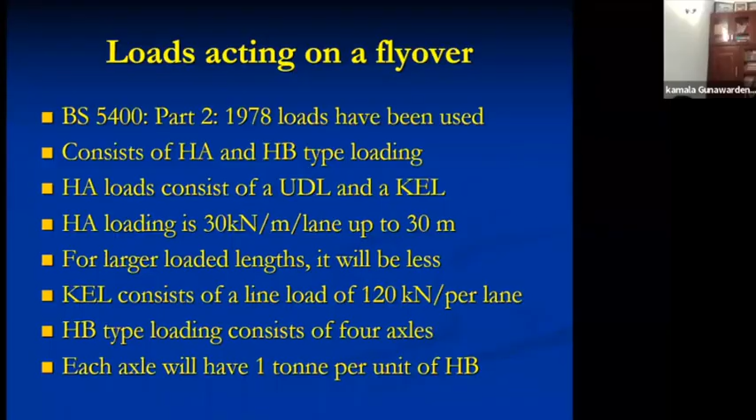Yeah, thank you very much. Thank you. Good night. Good night. Thank you. Thank you.